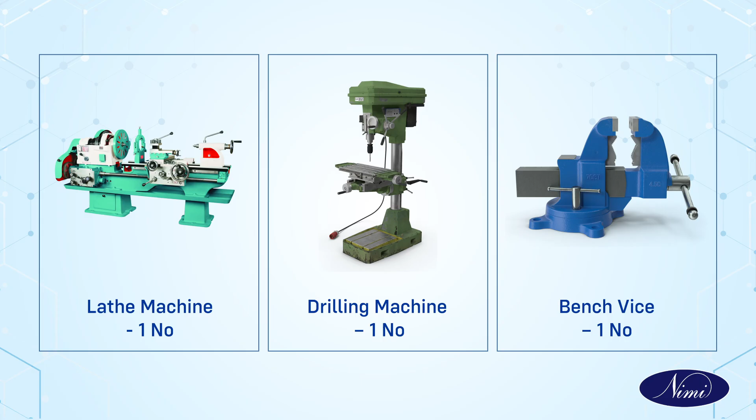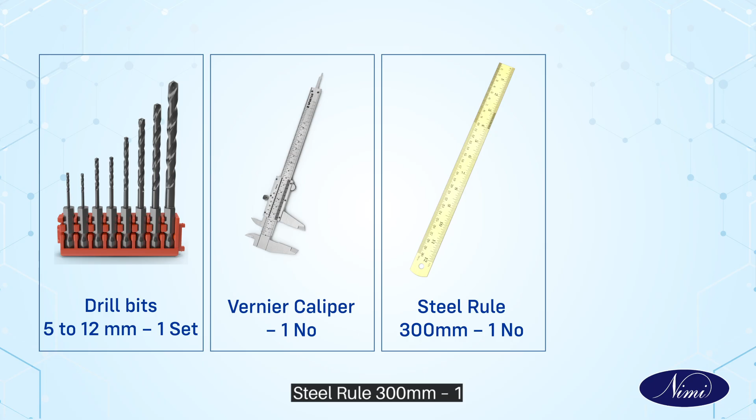Let us discuss the machineries and tools required for this practical. Lathe machine 1, drilling machine 1, bench vise 1, drill bits 5 to 12 mm 1 set, vernier caliper 1, steel rule 300 mm 1, file flat 10 inch 1.

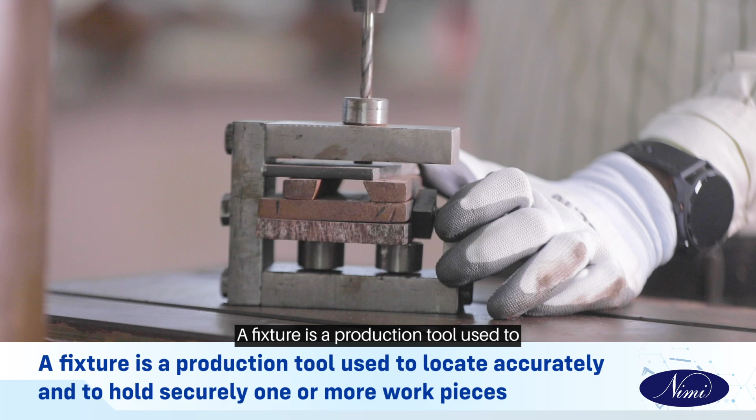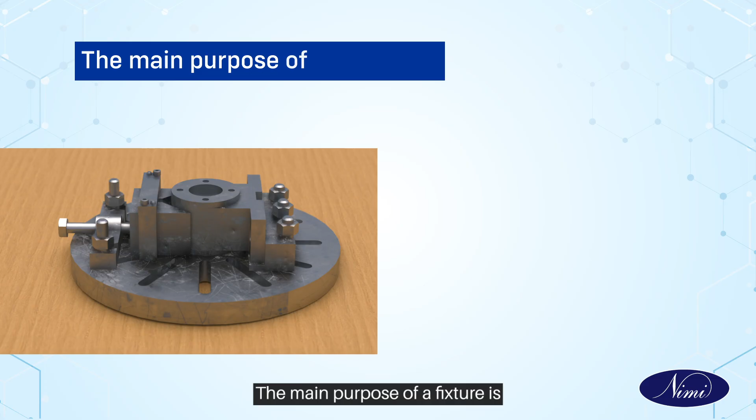Let us discuss fixtures for drilling. A fixture is a production tool used to locate accurately and to hold securely one or more workpieces so that the required machining operations can be performed. A fixture should be securely fastened to the table of the machine upon which the work is done. The main purpose of a fixture is to locate the work quickly and accurately, support it properly, and hold it securely.

Common types of fixtures used for machining operations are: 1. Milling fixture. 2. Turning fixture. 3. Grinding fixture.

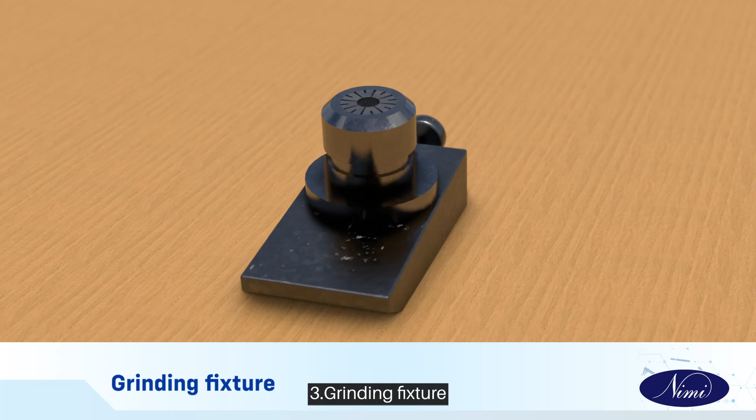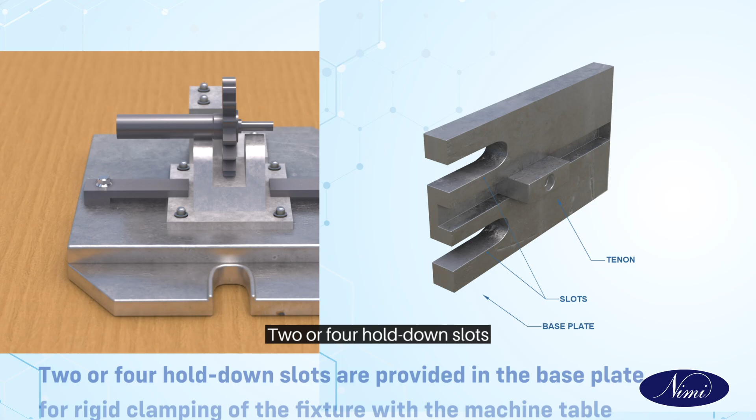Base plate. The base plate for a milling fixture is provided with tenons at its bottom for proper location of the fixture with the machine table through T-slots. 2 or 4 hold-down slots are provided in the base plate for rigid clamping of the fixture with the machine table.

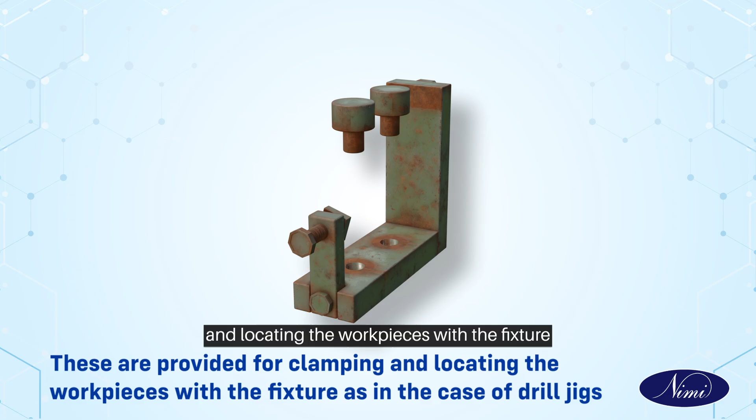Standard clamps and locators are provided for clamping and locating the workpieces with the fixture. As in the case of drill jigs, the clamps used in the fixtures are very rigid and sturdy.

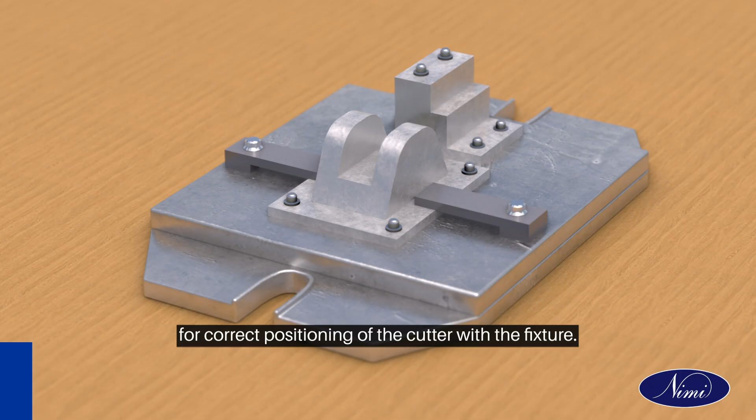The setting blocks are used to position the fixture and work relative to the cutter before machining. A feeler is introduced between the cutter and the setting faces of the block for correct positioning of the cutter with the fixture.

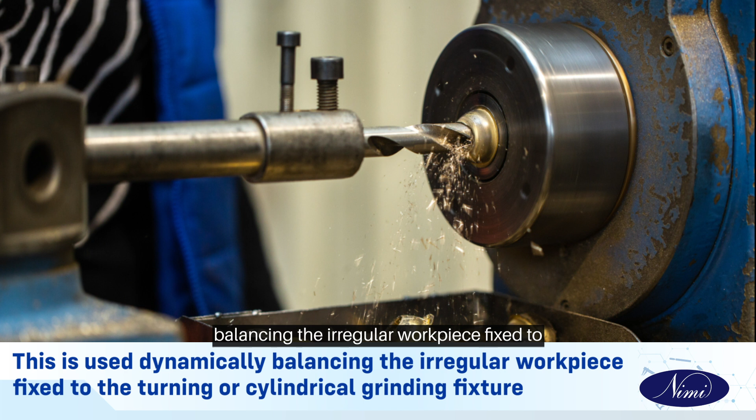Balancing weight is used for dynamically balancing the irregular workpiece fixed to the turning or cylindrical grinding fixture. In the case of a turning fixture, normally the base plate of the fixture is clamped to the face plate.

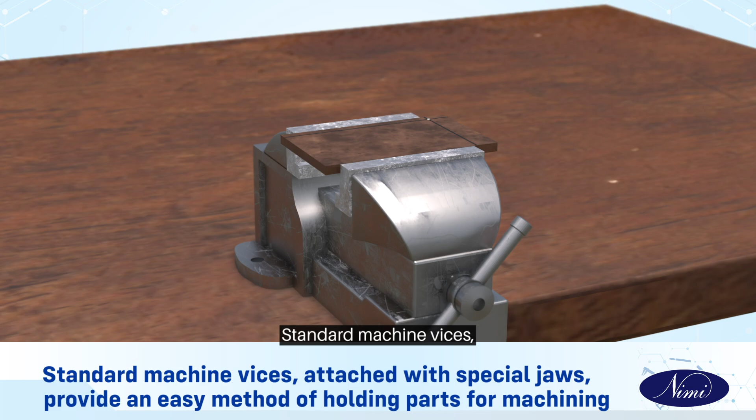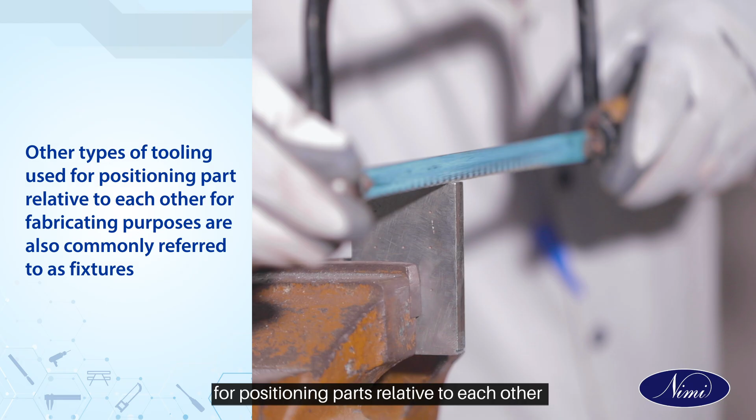Vise fixture. Standard machine vises attached with special jaws provide an easy method of holding parts for machining. Other types of tooling used for positioning parts relative to each other for fabricating purposes are also commonly referred to as fixtures.

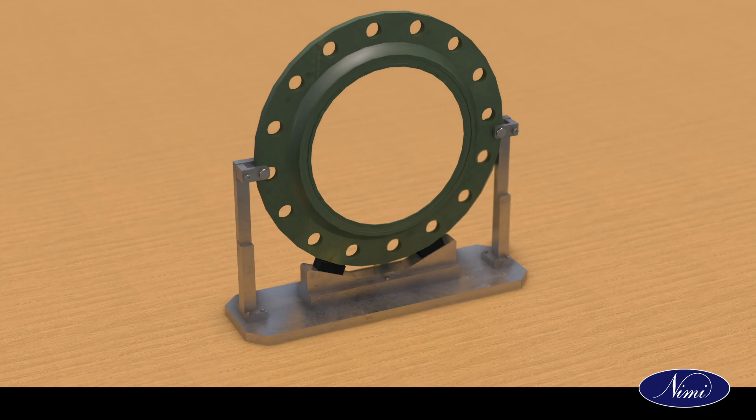Bending fixtures, assembly fixtures, and welding fixtures are examples of this type. The construction of a fixture depends upon the machining and fabricating methods employed.

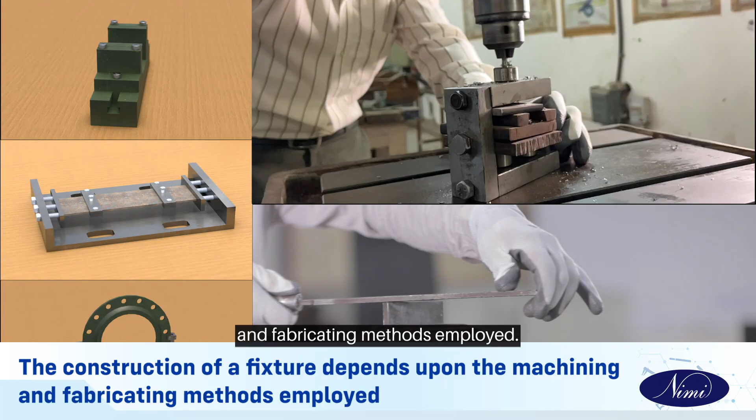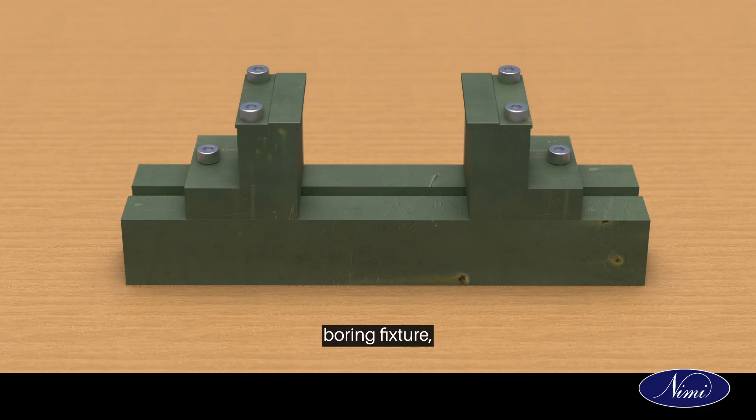Classification of fixtures. Fixtures are classified by the type of machine on which they are used. If a fixture is made for a milling machine, it is called a milling fixture. Some of the most commonly used fixtures are turning fixture, milling fixture, welding fixture, boring fixture, assembly fixture, inspection fixtures, etc.

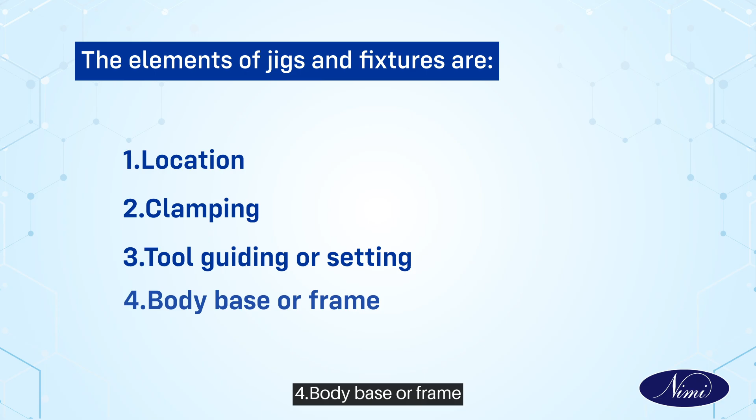The elements of jigs and fixtures are: 1. Location. 2. Clamping. 3. Tool guiding or setting. 4. Body, base, or frame. Types of fixtures: Plate fixture. These are the simplest form of fixtures.

Plate fixture is made from a flat plate which has locator and clamps to locate and hold the part.

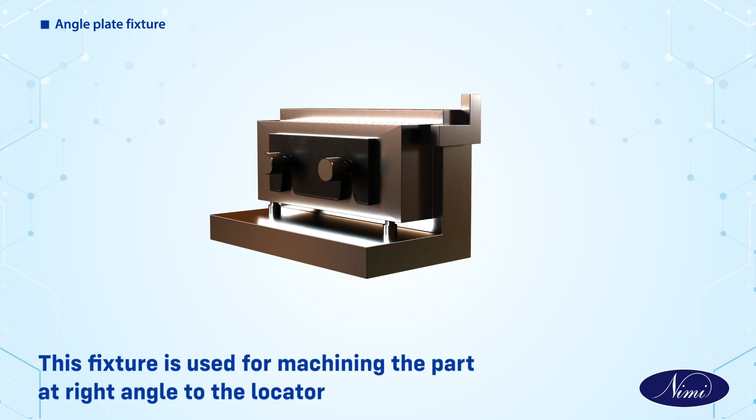Angle plate fixture is used for machining the part at right angle to the locator. Modified angle plate fixture is used for machining the part at angles other than 90 degrees.

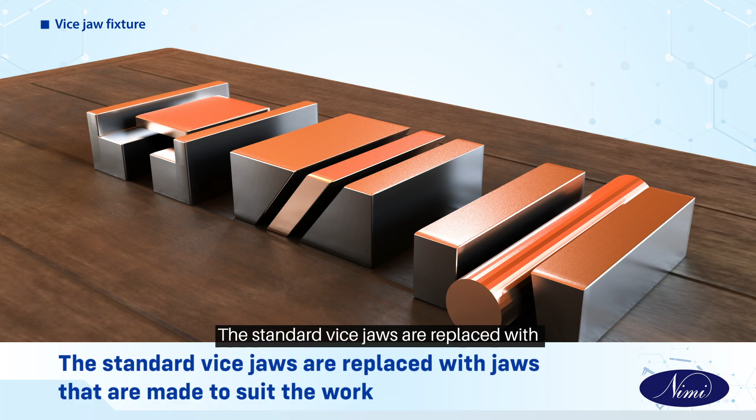Vice jaw fixture is used for machining small parts. The standard vice jaws are replaced with jaws that are made to suit the work.

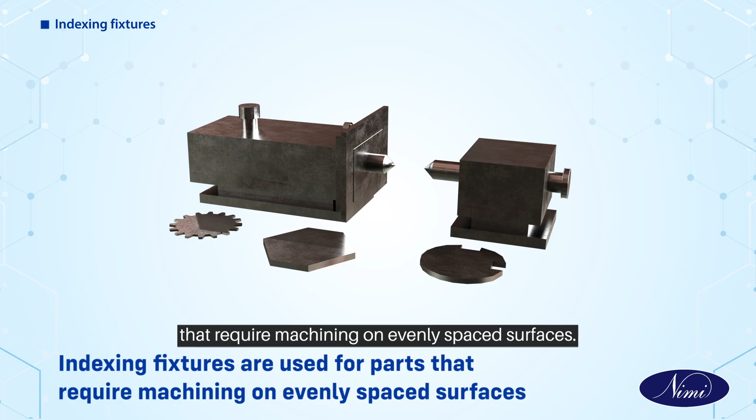Indexing fixtures are used for parts that require machining on evenly spaced surfaces.

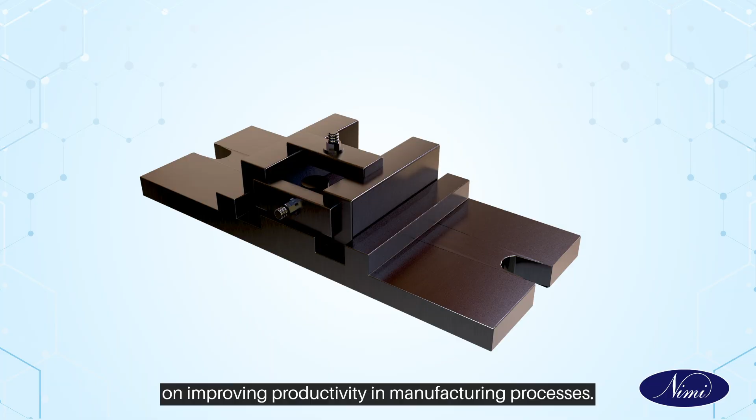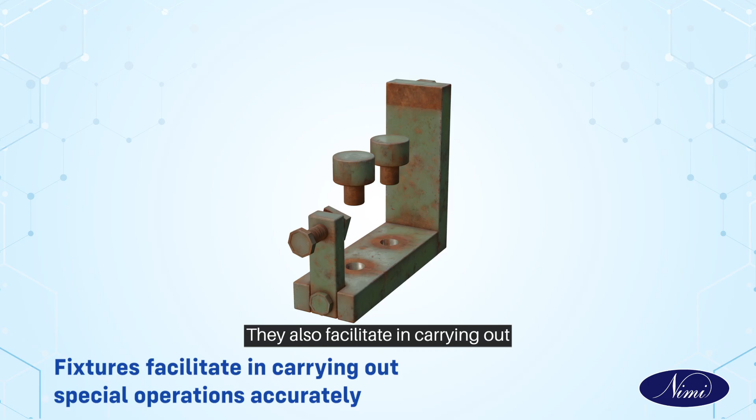Use of fixtures. A great deal of importance is placed today on improving productivity in manufacturing processes. Application of jigs and fixtures has contributed a lot towards this direction. Fixtures are devices used in manufacturing or assembling, and they also facilitate carrying out special operations accurately.

A fixture is a production tool that locates and holds the workpiece. It does not guide the cutting tools, but the tools can be positioned before cutting with the help of setting blocks and feeler gauges, etc.

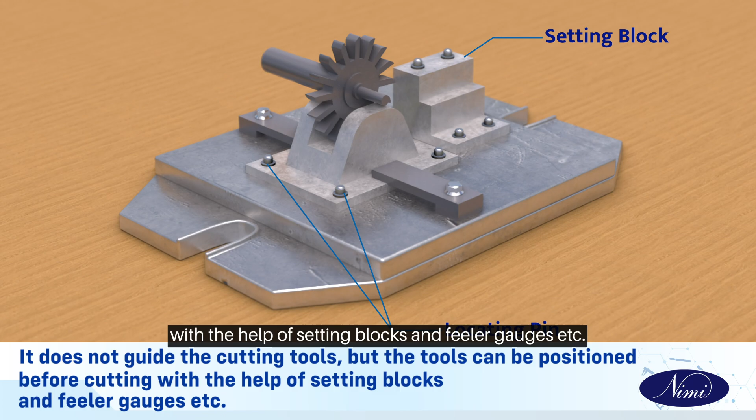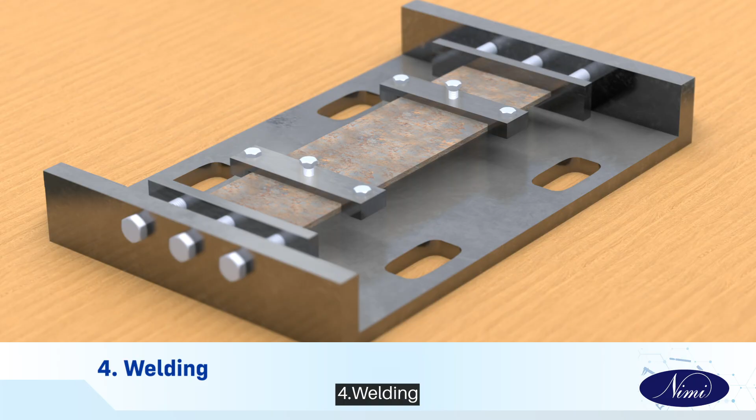Fixtures of different types are made for: 1. Milling. 2. Turning. 3. Grinding. 4. Welding. 5. Assembly. 6. Bending, etc.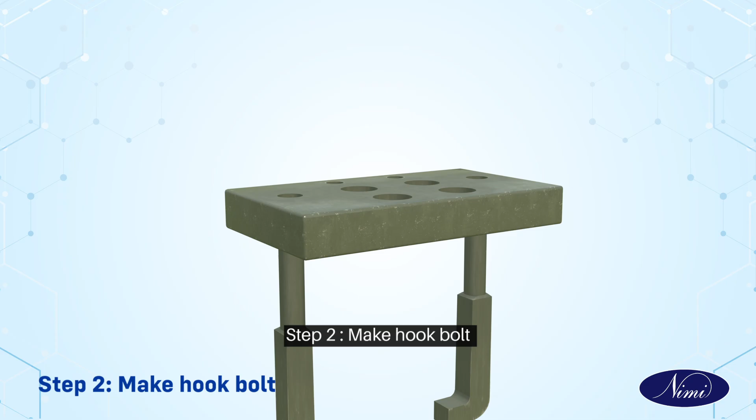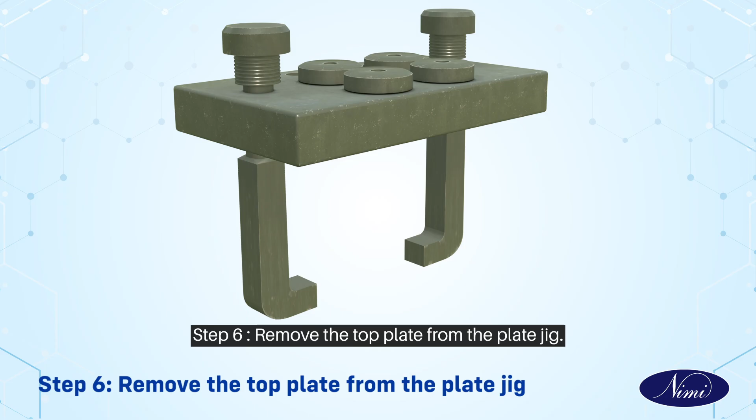Let us discuss the practical. Step 1: Make top plate. Step 2: Make hook bolt. Step 3: Make knob. Step 4: Make jig bush. Step 5: Drill jig assembly. Step 6: Remove the top plate from the plate jig.

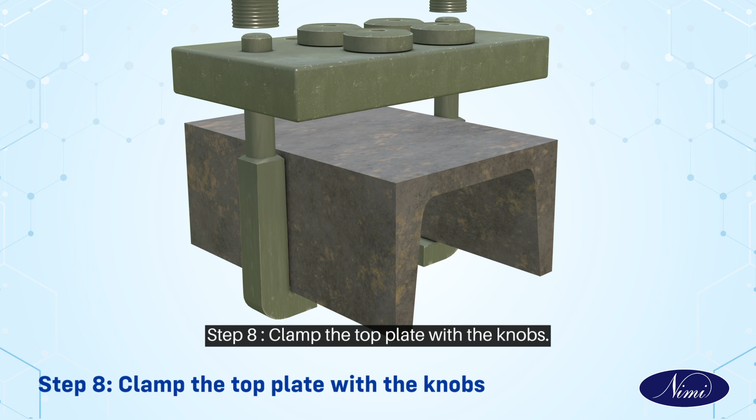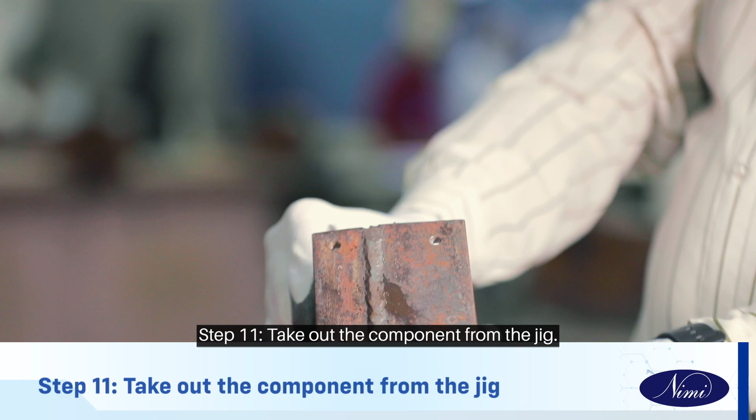Step 7: Locate component between the hook bolt and touch with stopper pin. Step 8: Clamp the top plate with the knobs. Step 9: Drill diameter of 6 mm, 4 numbers. Step 10: Remove the top plate. Step 11: Take out the component from the jig. Step 12: Check the component with a vernier caliper.

In this video, we have discussed the basics of fixtures, their features and types, how to locate a workpiece in a jig, drill the hole on MS channel, and check for accuracy.